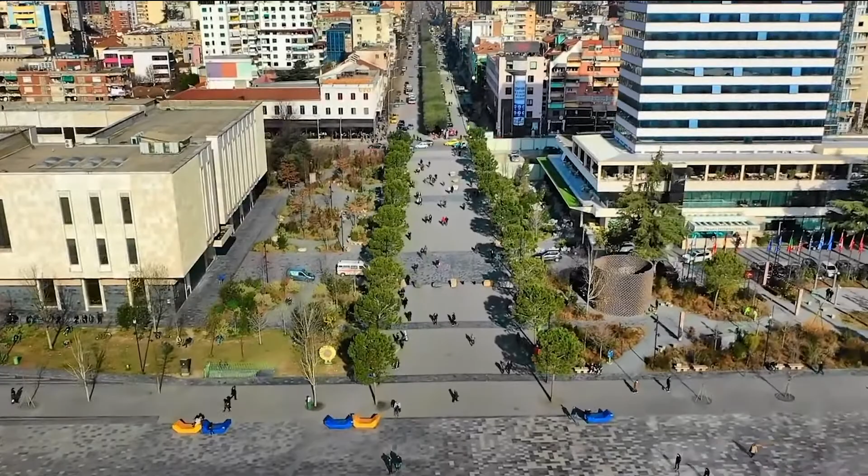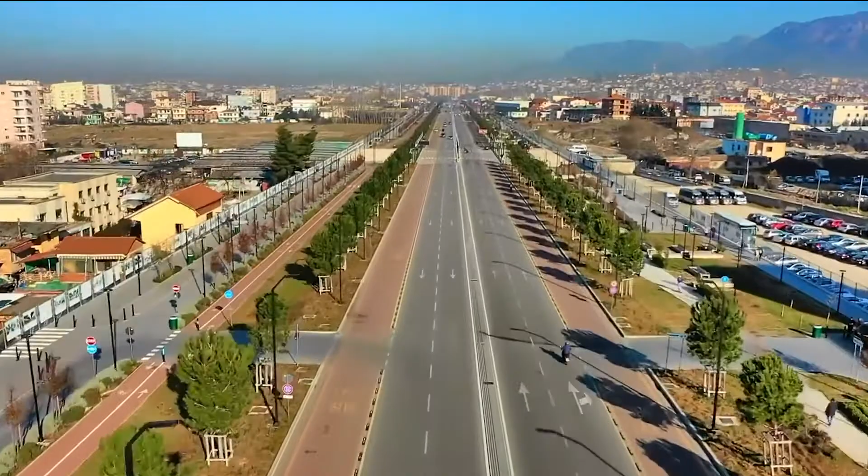The new City Hall is located on one of the new intersections along the new boulevard. Given the importance of the building for Tirana, this space is enlarged to become a simple square of 200 by 200 meter, substantially more prominent than the other envisioned public areas along the boulevard.

People come together in public space. The project claims the possibility for a new civic space in this particular place, a reference for the future new neighborhood.

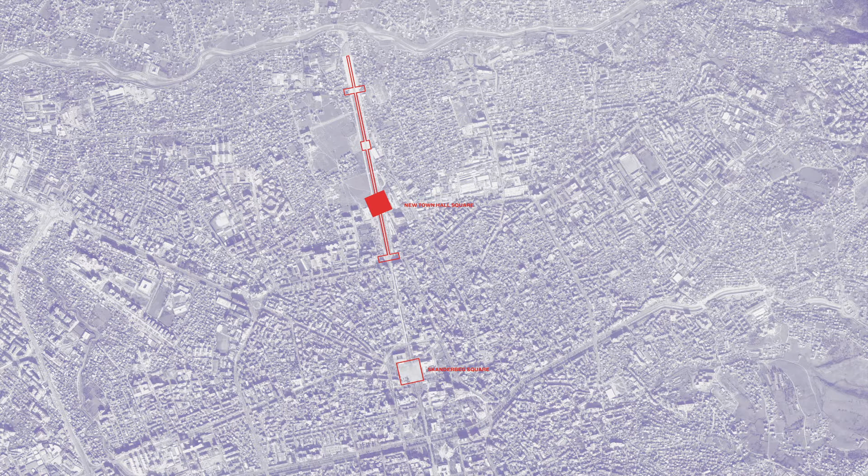The new City Hall engages with these site conditions. It maximizes the exchange with the boulevard and outlines a uniting volume that defines a coherent backdrop for the new public space.

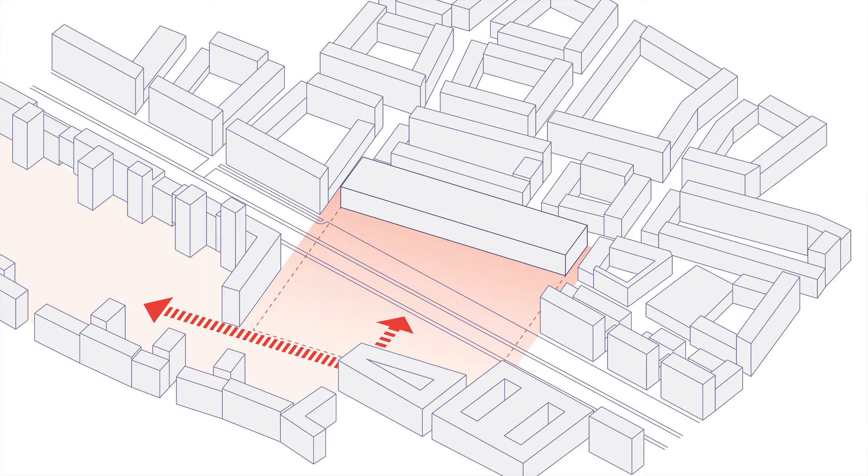The minimal repositioning of some volumes along the west side facilitates a more effective connection to the programmed World Park, while on the other side the public space penetrates the building through the collective atrium all the way up to the roof.

The design of the building envelope is strongly based on the bioclimatic principle of reducing solar radiation on the facade, while enabling light and open views towards the surroundings.

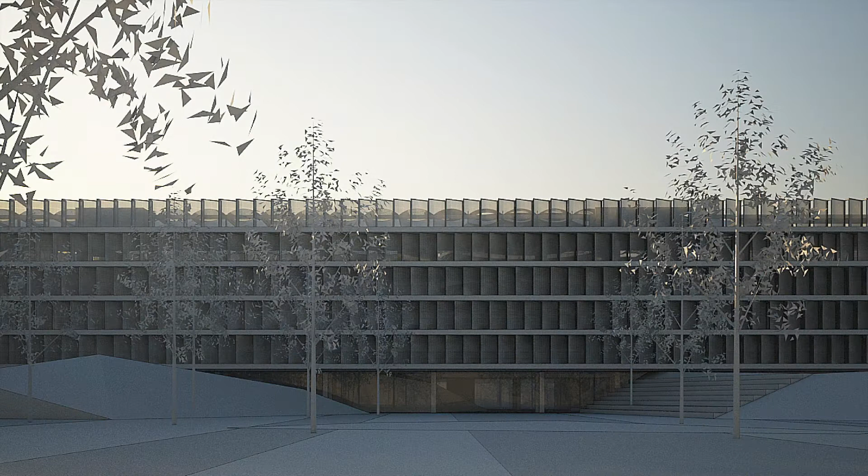The resulting facade reverberates. Depending on the view angle or the time during the day, the building appears differently. A slight differentiation on the tones of the metal cladding increases the abstraction of the mass, distinguishing itself from the corporate appearance of conventional glazed buildings.

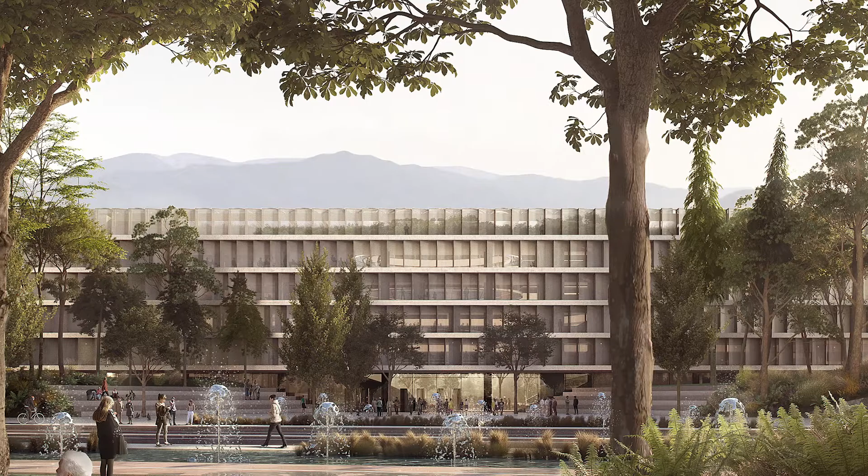Likewise, the roof design aims to minimize the solar gain while maximizing the light into the atrium, thanks to a thoughtful cushion design using transparent ETFE layers and photovoltaic cells integrated on the south-facing parts.

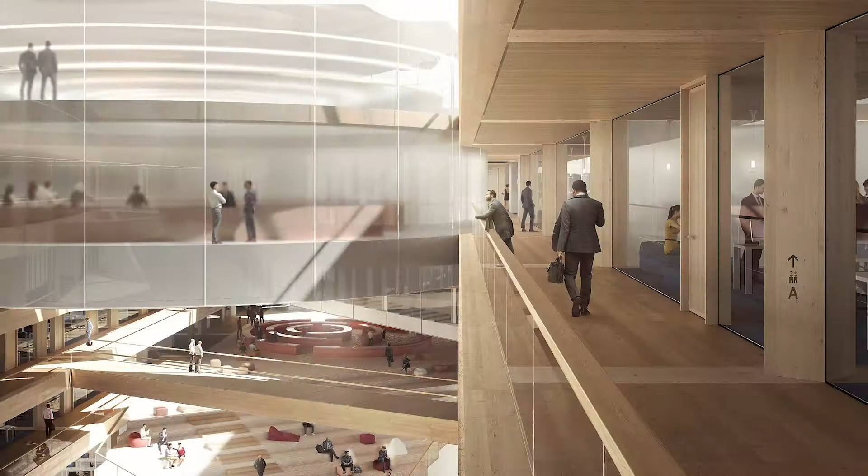The building is composed of an efficient ring of offices, a permeable atrium with collective functions, and a publicly accessible roof.

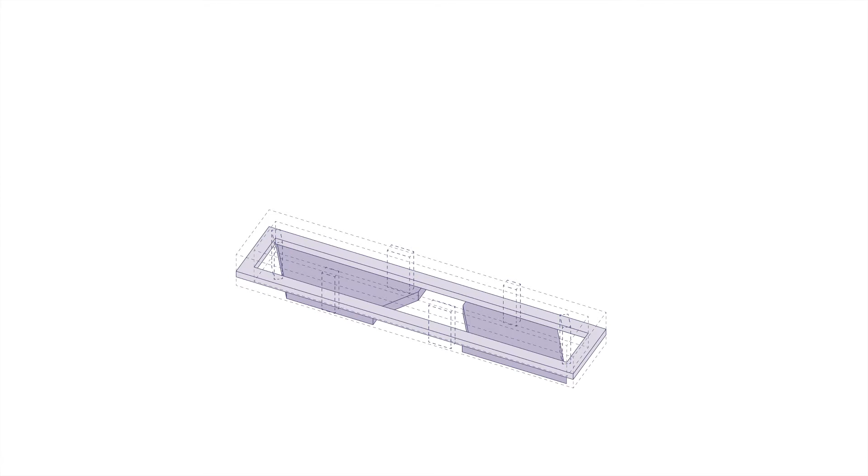The linear arrangement of the workplaces and their amenities defines a flexible floor plan where it is possible to create different office layouts with favorable space usage ratios.

The floor grid, in combination with smart flooring solutions, allows floors to be fitted out as cellular offices, open plan offices, activity-based offices, and anything in between.

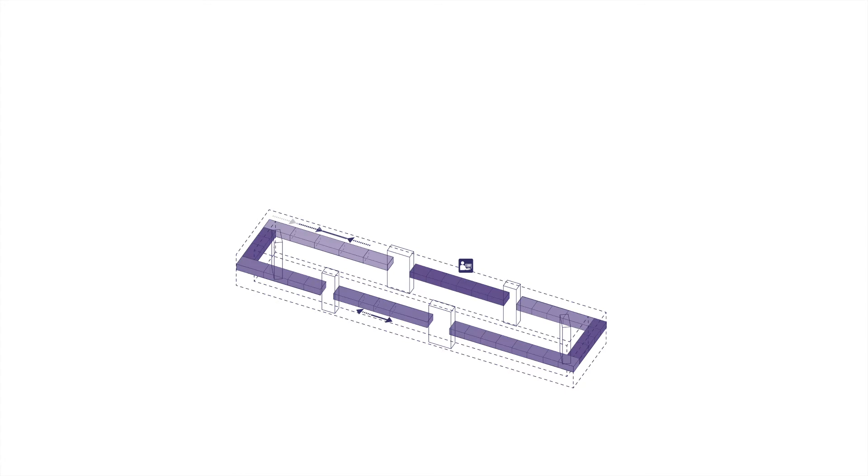The building has a clear circulation scheme with the possibility to separate the public and the private access.

The main structural parts of the ring office are made of locally available and sustainably harvested wood, aiming to become a carbon-neutral building even in construction.

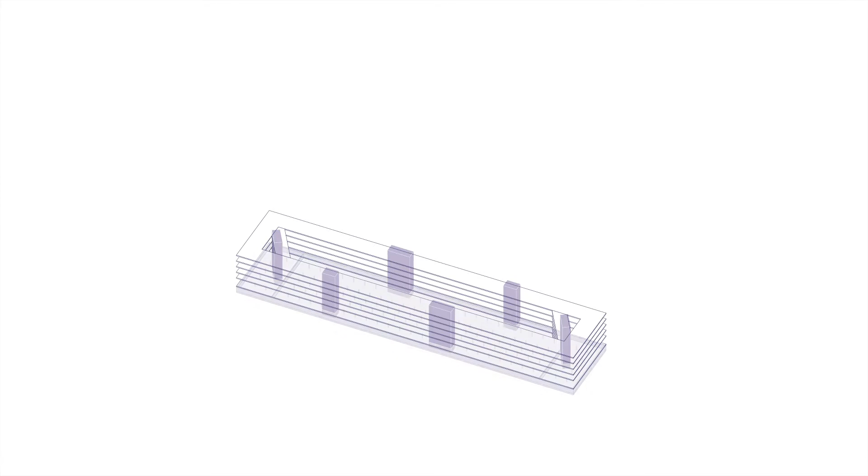The building design supports natural ventilation and minimizes the use of mechanical systems. Fresh air enters the offices by openings integrated in the facade, overflows in the atrium, and is then exhausted by the roof.

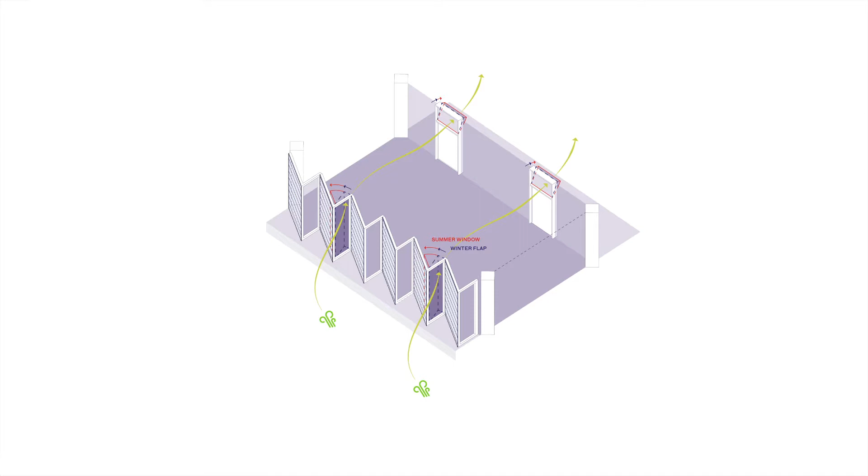The office spaces are equipped with slab-embedded heating and cooling system, while user-controlled ceiling fans are used to improve the perceived individual comfort.

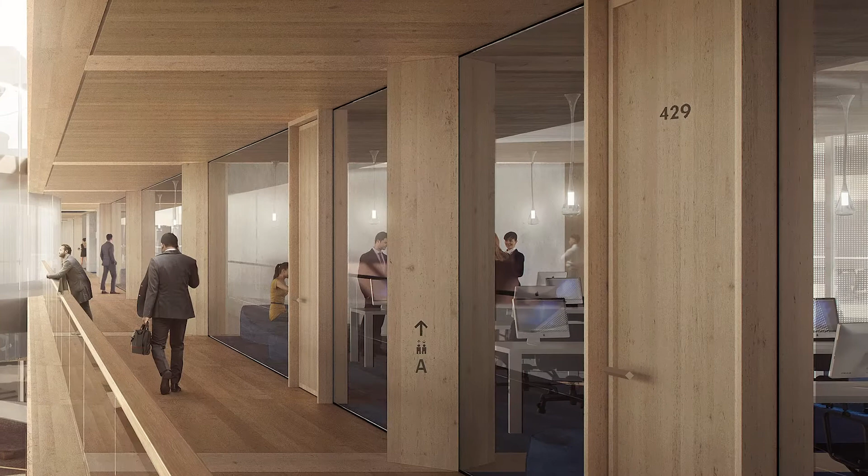The ring is a rational and transparent frame to work efficiently and communicate clearly.

The collective atrium is composed of extroverted and interconnected volumes that provide space for a dynamic set of functions for both the city administration and the public.

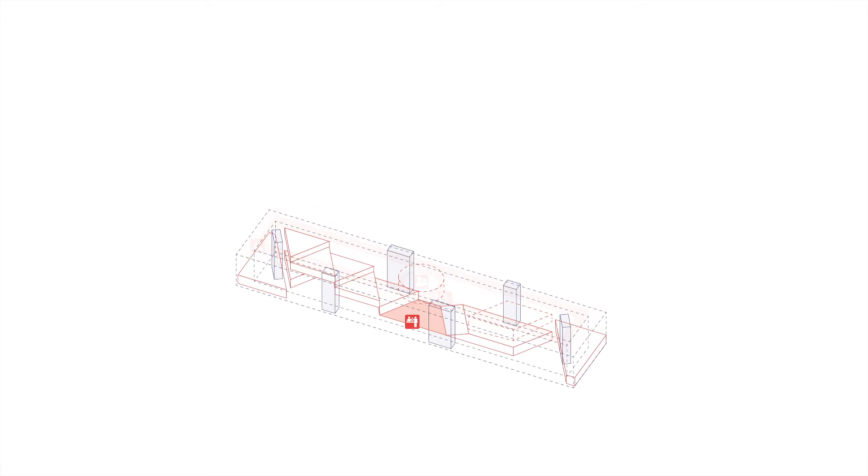Here, educational and cultural initiatives foster active participation, curiosity, diversity, and exchange, thus reaffirming the role of the city as an active and engaged member of the community in which it was founded.

The step volumes of the atrium are built with a system of steel truss girders embedded in the floor, ceiling and walls.

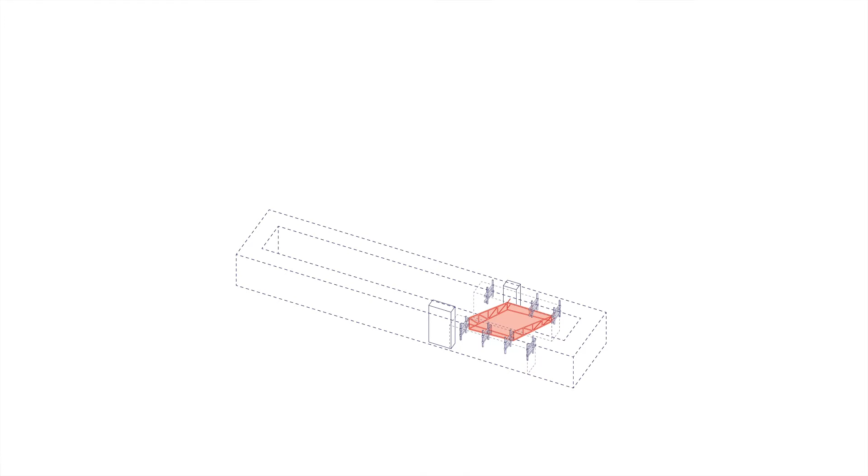The atrium provides a space for a genuine encounter between civil society, administrators and politicians to encourage debates concerning the future of the local communities and their territories.

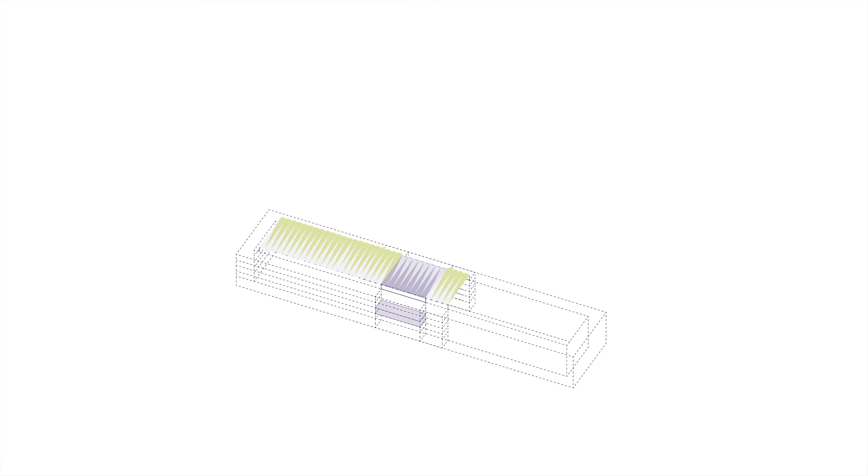The new City Hall energy supply concept is based on local and renewable energy resources, such as groundwater for free cooling and integrated photovoltaic cells on the roof. As a result, the building operation will be carbon neutral.

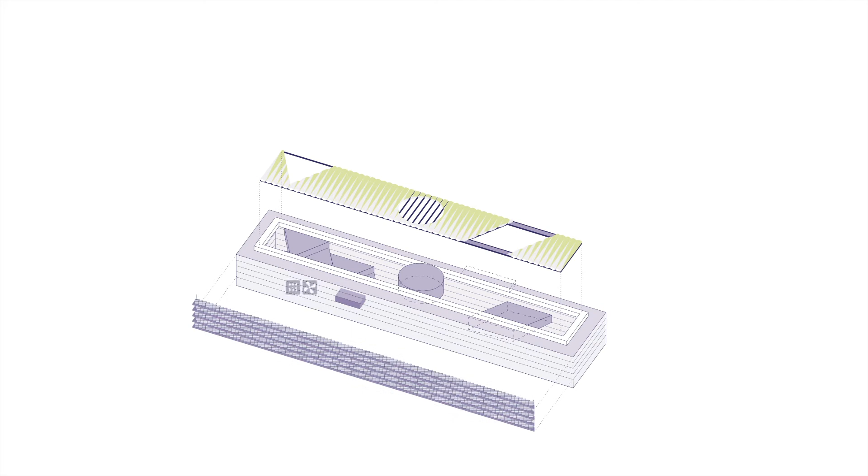Together, these strategies save about 30% of energy compared to comparable buildings. All these measures combined with a local and renewable energy generation make the new City Hall the first zero carbon emission building in Albania, potentially in the Balkans.

The pure volume of the new City Hall is beautifully framed by the hills surrounding the city. The new square creates a visual and physical link to the mountains that represent the resilience and the vitality of the community of Tirana.

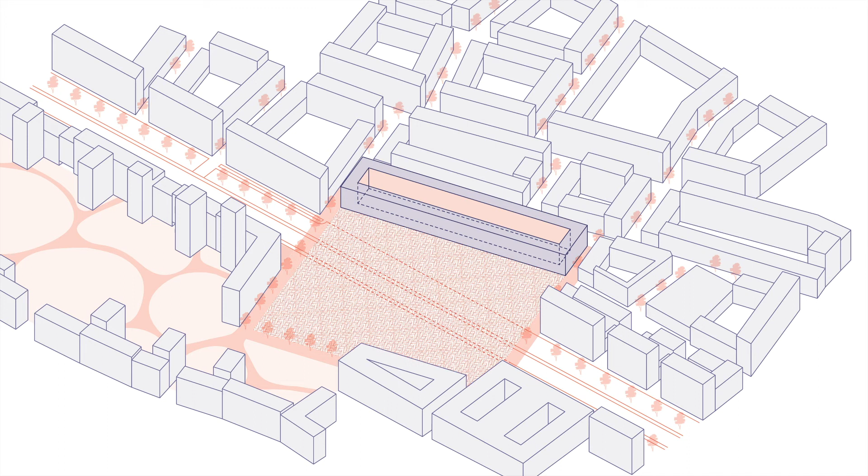By bringing some elements of this natural landscape to the square, the link becomes physical and sensorial. A new equilibrium between city and nature is seen, felt and smelled.

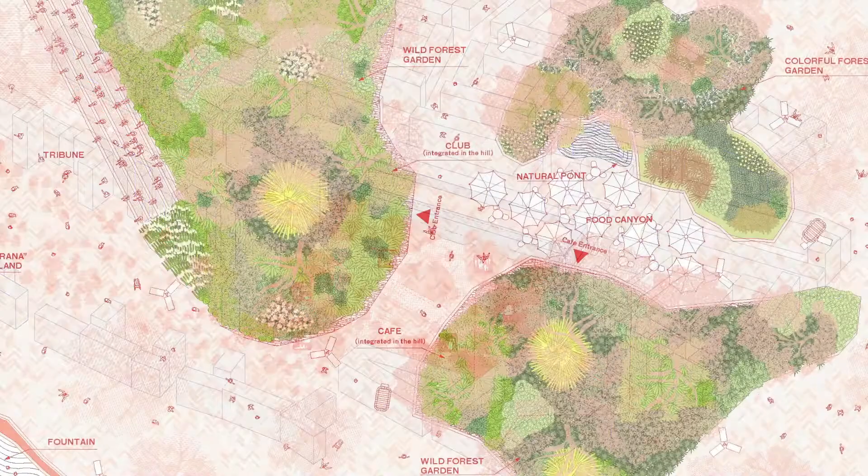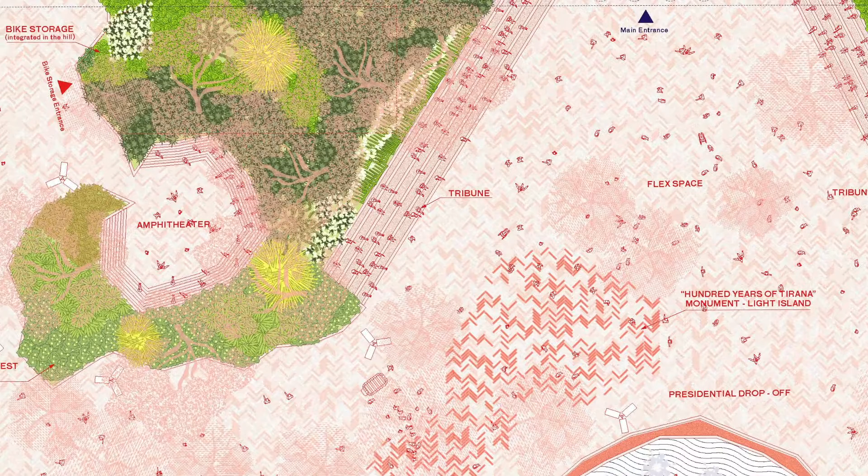The rocky surface of this cluster of hills evokes the mountainous landscape of the valleys surrounding Tirana, while local plants and indigenous trees define a series of lavish gardens on the square, a real cutout of nature into the cityscape.

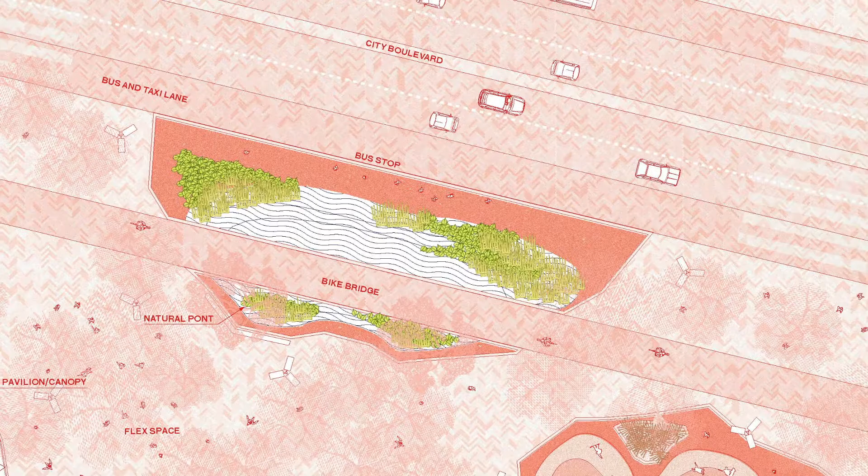Some of the hills are programmed for various uses, such as a stage, a fountain or a skate park. Others hide interior functions, such as the bike storage, the underground parking entrance, the tourist info point, the cafe and the connected services.

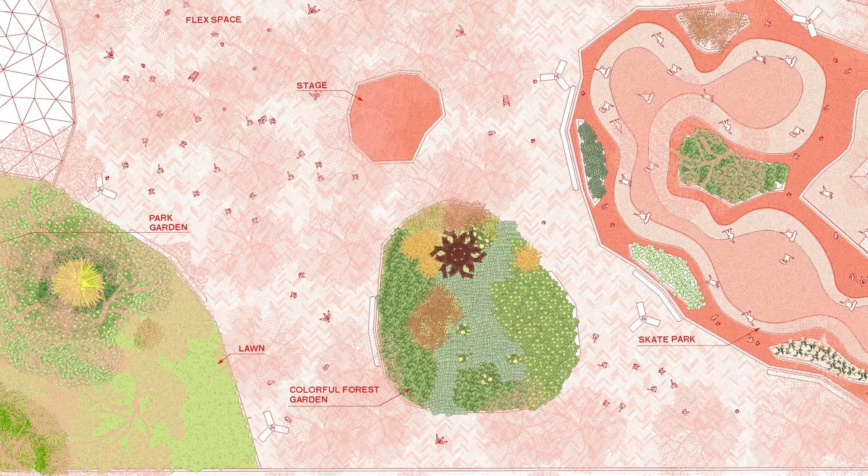The square becomes an extension of the new City Hall with complementary activities. This new public space is conceived as an open-air community center that houses many different functions to become a valuable gathering point and destination for the people of Tirana from all age groups and backgrounds.

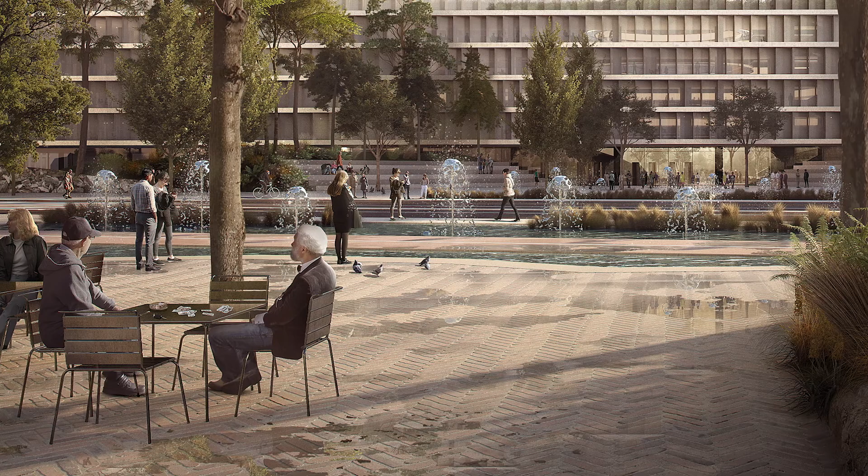The new City Hall sets high environmental standards to become a tangible example for the future development in Tirana. It provides spaces of agency and representation for citizens, civil society and public administration. The new City Hall is the place where to forge a renewed citizenship based on dialogue between communities and generations.

The team consists of passionate and skillful professionals that have worked together, bridging the knowledge between disciplines and creating the best synergies for this specific project.

The approach of the design team is highly collaborative, and for the future, it aims to operate as a network of specialists in direct cooperation with the people and the municipality of Tirana.